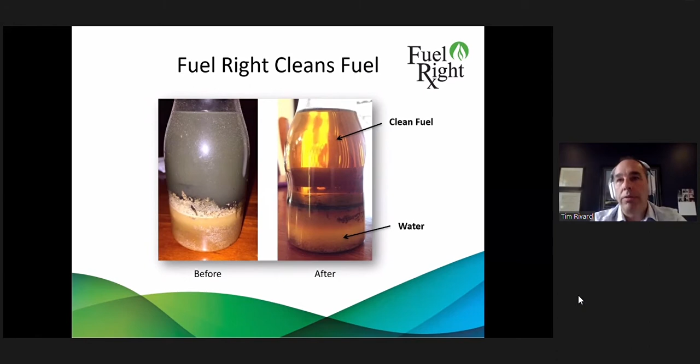This example is designed to give you some imagery of what we could do to fuel in any application. We can take it from extremely dirty fuel to clean fuel, separating out contaminants, allowing you to drain off those contaminations. This is just a laboratory-based sample showing what happens over a 21-day period.

So what's our value proposition? Additives today are typically promoted to focus on engine performance. They certainly discuss cleaning injectors, reducing emissions, improving fuel economy. But what's really missed is what's happening on the delivery side of that.

In the storage system is where everything starts. Microbial contamination, especially today with very low sulfur heavy fuel oils, is something we expect to see more of because of the sulfur reduction in the fuel. But that plays a significant role in fuel quality. So our role is to make sure storage is taken care of, which affects everything downstream, from filtration, from purifiers, to actual engine performance.

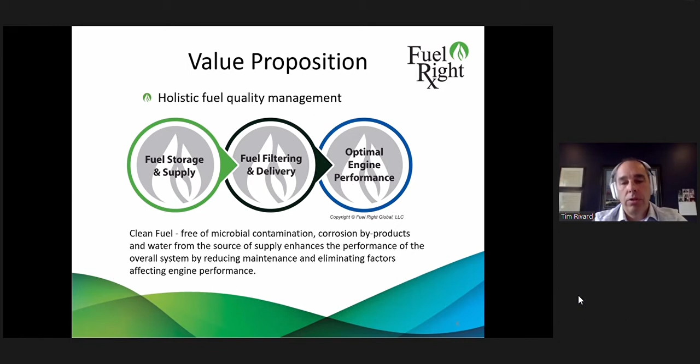So we would classify ourselves as a bit of a disruptive technology. We play the role of a catalyst, we improve lubricity, and we eliminate the need for biocide, all in one chemistry, which is quite unique.

The features and benefits for the marine sector are to reduce emissions, reduce engine wear, reduce carbon deposits, which will extend lubricating oil life and enhance fuel lubricity, affecting in a big way the purifying systems and the maintenance required to clean out those systems.

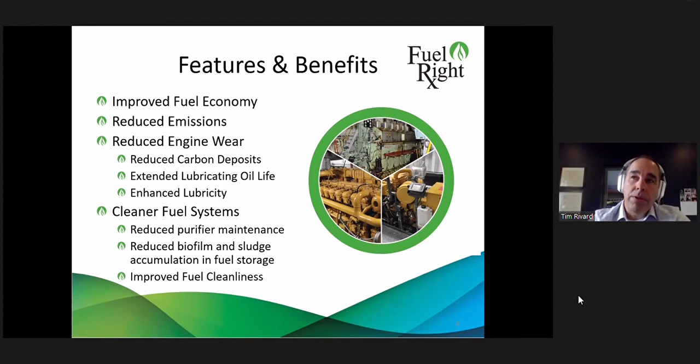My presentation is going to actually contain real data to demonstrate what we do. So this is an example: a super yacht running diesel fuel out of Southeast Asia, actually a New Zealand flagged vessel.

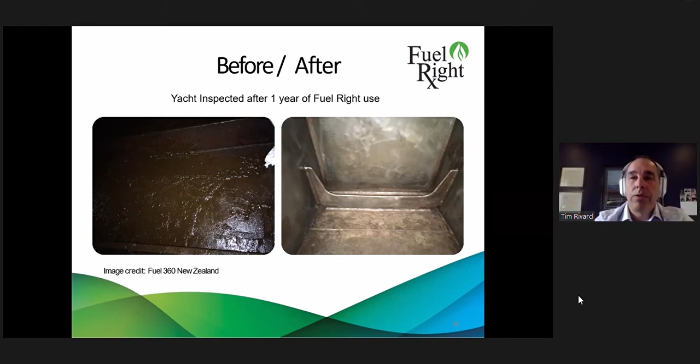This is a before and after: one year of using Fuel Right, and the tanks are that clean without pressure washing. It seems hard to believe, but this is the case. When we opened this tank up after a year of use, this is what we found. Before we started the program, we actually cleaned the tanks, and on the left is what was there prior to cleaning. So over a year, it kept the tanks clean. Here are a couple more images from inside those tanks.

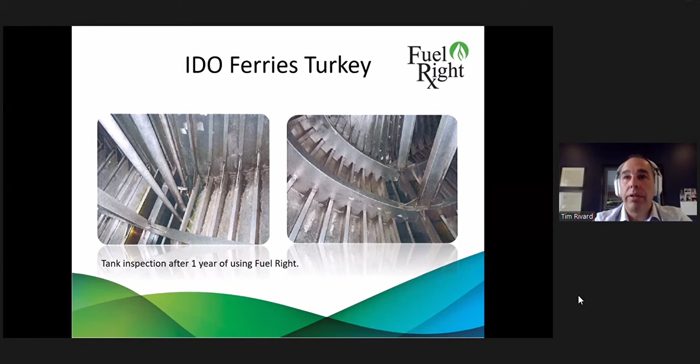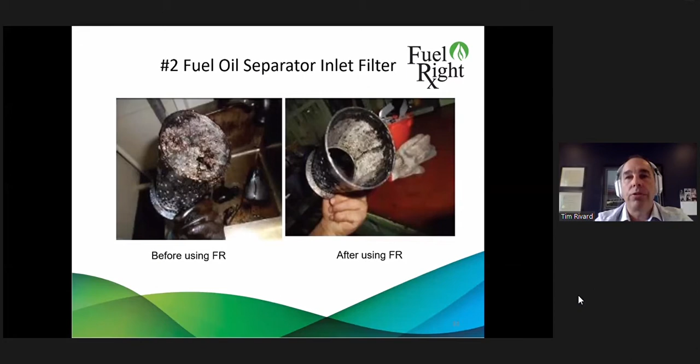This is an aluminum ferry belonging to IDO out of Turkey. They had severe contamination issues, and this is after a year of use of fuel. We run heavy fuel oil for Shenhua in China. This is showing some of their filtration equipment, and they've seen a significant improvement in filter service reduction.

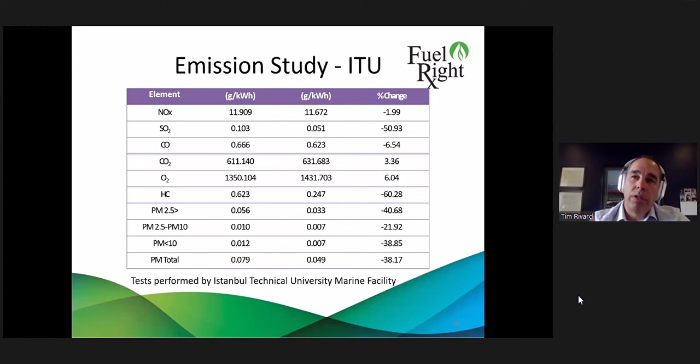From an emission standpoint, we did a study with the Istanbul Technical University Marine Facility. One of the ferries was tested, and you could see here, as an independent study, a 60% reduction in hydrocarbon and a 38% reduction in particulate. We do see a minor reduction in NOx and SOx, and the increase in CO2 is really indicative of improved fuel economy. So actually, you're going to burn less fuel, but you can't change the physics of combustion.

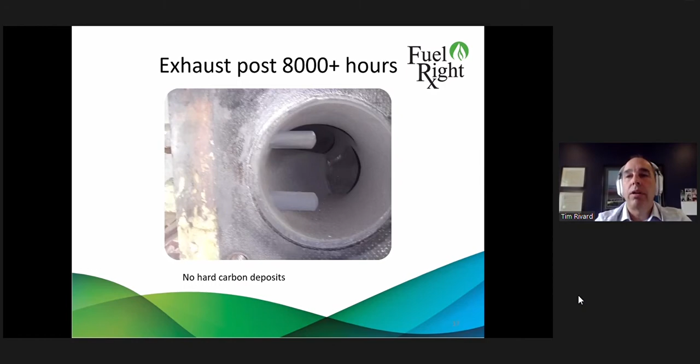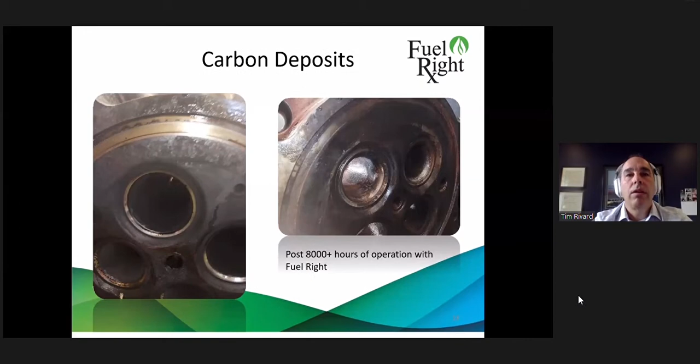We ran an engine with Elin Ship for in excess of 8,000 hours, and then we tore the engine down to look at what happened to the inside of that engine. What they found was no hard carbon deposits, which is reflective of particulate matter reduction. You can see here the valves on the cylinder heads. There's no hard carbon deposits inside these engines. The cylinders weren't scored. And the one thing that's really important to understand is that when you reduce particulate in the combustion chamber, you reduce the blow-by that would end up in the lubricating oil. So actually, you would improve your lubricating oil life on this type of program.

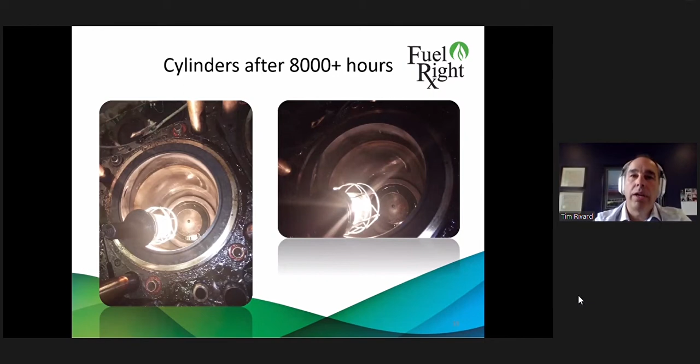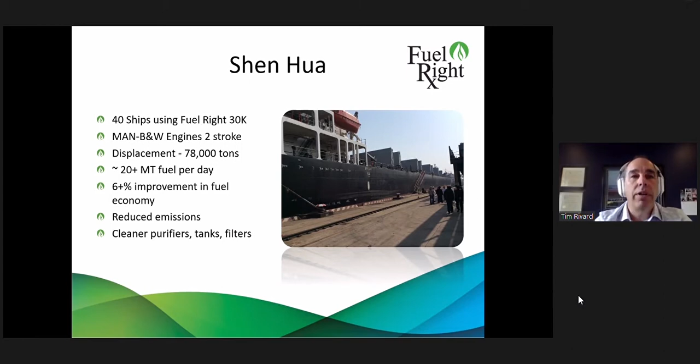This is Shen Hua. We treat 40 ships with them. They treat every lot of fuel that's loaded on these vessels. They're running two-stroke B&W engines, and they saw in excess of a 6% improvement in fuel economy and a significant reduction in emissions. But they independently hired a company to do a study to review the actual impact on reduction of emissions. They're looking at upwards of 300 tons of fuel consumption reduction, 650 plus tons of CO2 reduction, 2 tons of SOx, and 17 tons of NOx. So significant impact on emissions.

With Elin Ship, in terms of servicing their filtration, they extended their filtration service from every 30 days to every 60 days. The filtration changeover was doubled. The purifier maintenance was quadrupled, from 30 days to every 120 days, significant savings for them there. And they also noted a 12% improvement in fuel economy. So there's significant savings there.

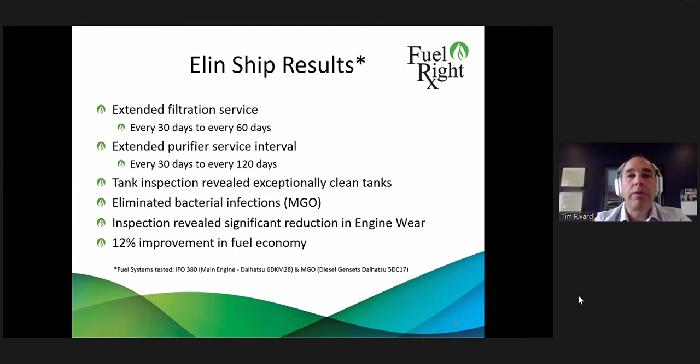So what is our experience? Obviously, entering this market takes trials and time. The first few years was really running a lot of operational trials, but we started out in workboat, primarily on the east coast of Canada, and then we expanded from there into chemical freighters, commodity freighters, ocean freighters. This is one of our clients, Elin Ship, but with China Energy, we do 45 vessels with them for the past 5 years. We run with Severn, Queensway, Loadline, Elin Ship out of Greece. We have an agent that supports us out of Greece.

In the workboat sector, we have been providing our chemistries to Atlantic Towing since 2011. That's expanded out to some of their offshore service vessels. We do work with the Canadian Coast Guard here in the Great Lakes through one of our fuel dealers. We do the New Zealand Coast Guard, Turkey Coast Guard. We also do a lot of work in the fishery industry. Most of that's undocumented because it goes through our distribution group. We service the ferries for Edo, which is 35 ferries ranging from roll-on, roll-off to high-speed catamaran ferries running MTU engines. We've done work in the Philippines and also with Dursa ferries in Brazil.